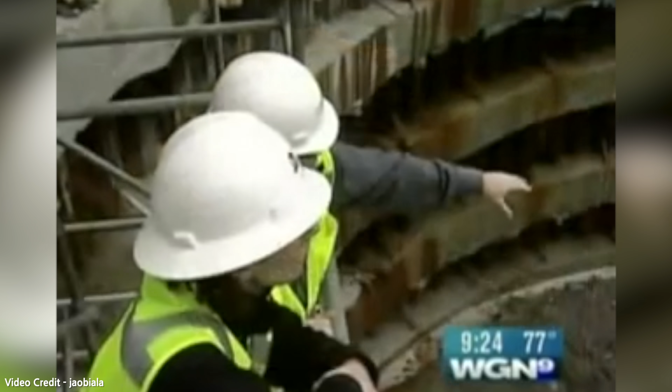What's even more mysterious is the enormous man-made hole in the ground. But that's actually the remnants of one of the most ambitious skyscraper projects in North America. It would have been not only the tallest tower in Chicago and America, but at the time, the whole world. This was truly a momentous project that was poised to shape the skyline of Chicago forever. However, as construction began on this monolithic tower, everything just stopped.

So today, join me as I look into what this infamous project was set to become, how millions of dollars were wasted on a dream so close to becoming reality, and how an 80-foot deep foundation sits abandoned even to this day. This is the Chicago Spire.

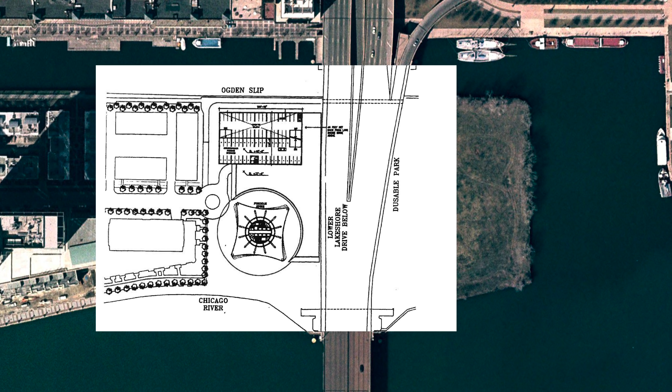The location of this project was set to be in DuSable Park, an undeveloped patch of land along Lakeshore Drive. However, because of that road splicing through the middle of the parcel, the tower's surface area would only take up around 2 acres of land, meaning it would have to be rather slender, at least for the area and time.

In early 2006, the Chicago Plan Commission had approved the tower to proceed further. Despite this, however, Fordham was having trouble finding their proper financing to get the project going. They eventually sold off their land and project IP to an Irish-based firm named the Shelbourne Development Company. Garrett Kelleher was their CEO, and now with their own money behind the concept, the tower's development moved forward.

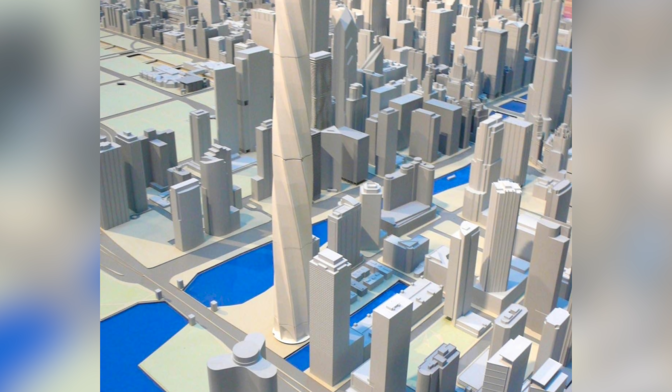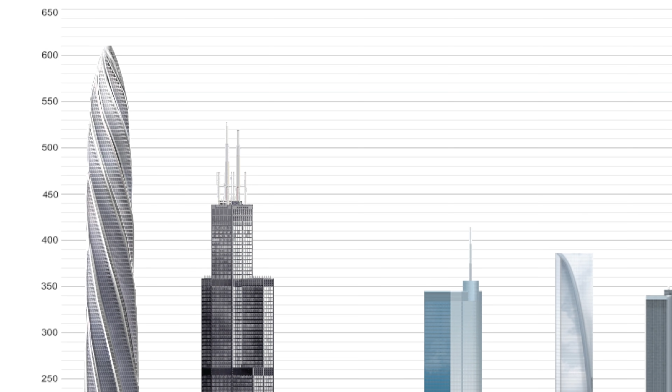With that approval from the city, the height restrictions were lifted, and plans grew to an all-condominium tower topping off at 2,000 feet. With the name now changed simply to the Chicago Spire, this new design also eliminated the radio tower, making the skyscraper into a 150-floor, 1,193-unit super condo building. The spire would rise well above the already tallest building in Chicago, that being the Sears Tower, and would have become the tallest building on the planet.

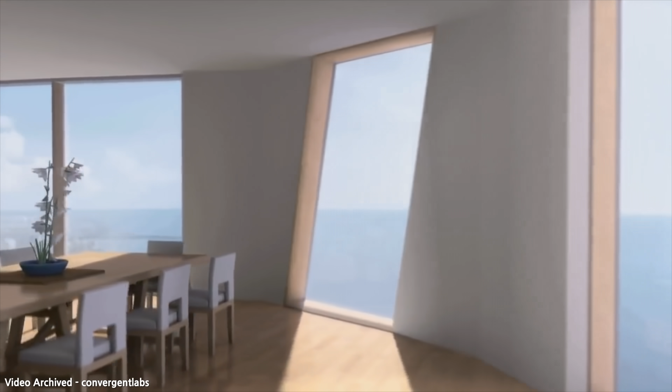That title, however, would have been beat out by Dubai's Burj Khalifa, which was set to open in 2010. Regardless, this tower was enormous and quite a unique piece of architecture for its time. In fact, careful consideration was given to how the design would affect natural occurrences like bird migrations, and the winding tower would allow for every apartment to have a slightly unique floor plan.

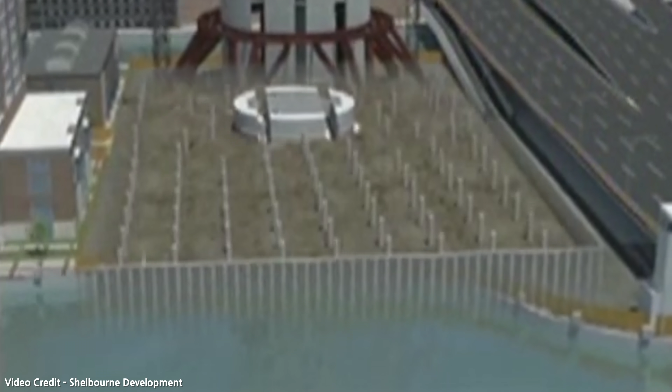It was promised to be eco-friendly and have minimal disturbances to the otherwise quiet neighborhood. It also was to be constructed so that the majority of traffic would funnel out onto Lakeshore Drive and not onto the quiet North Water Street. Actually, speaking of all of those cars, they wouldn't be crowding up valuable surface space. No, this enormous tower would have 7 levels of underground parking, making it the largest in the city.

Since that meant only the surface area of the building would be minimal, the rest of the adjacent land would become green park space open to the public. The total estimated cost of the project was somewhere around $2 billion, and as the development company worked closely with local leaders to revise the skyscraper even further, the Chicago Spire had a promising future.

With an estimated construction date of 2007 and an opening in 2012, by March of 2007, local residents seemed to have liked where this development went, and now the project met minimal opposition. However, it is important to note that many people had mixed feelings and doubt on even the validity of getting it done. But the developers of course pressed forward, and after the zoning committee and subsequent Chicago City Hall both approved the final project plans, Chicago Spire was fully approved and ready to start construction.

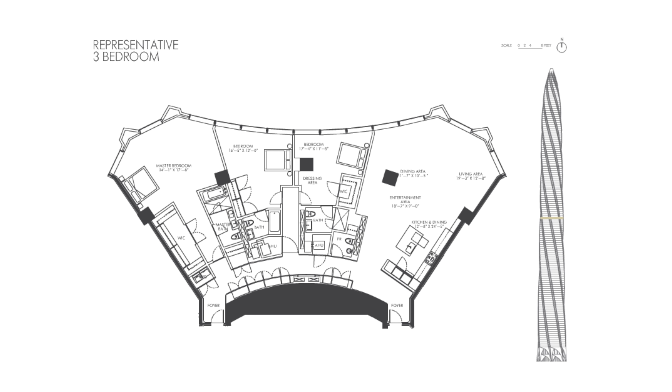Hundreds of thousands of dollars was spent on a sales center as floor plans began to pop up on the MLS, and by summer of 2007, ground was broken. Construction then commenced on the enormous and audacious foundation.

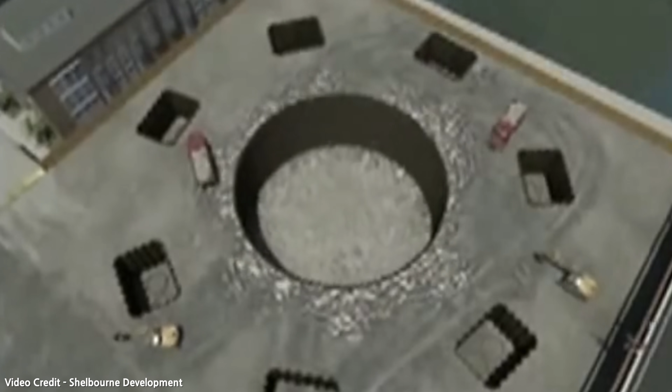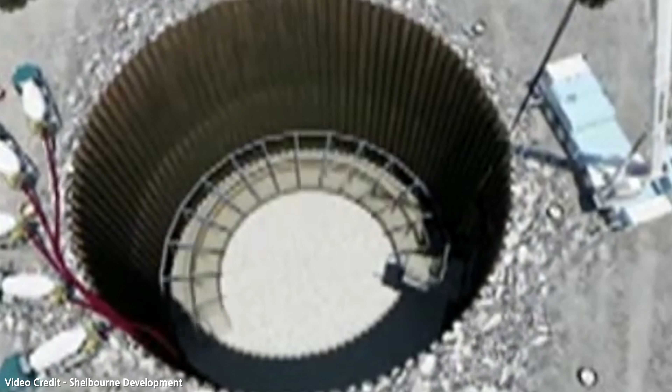Because Chicago Spire was such a tall and slender tower, a deep and complex foundation would need to be dug, first with what is called a cofferdam, essentially a large walled-off opening underground, to allow the tower's concrete spine, which would contain elevators and staircases, to be constructed.

By June, Shelbourne announced the Chicago Spire was already 30% sold, including the $40 million two-floor penthouse.

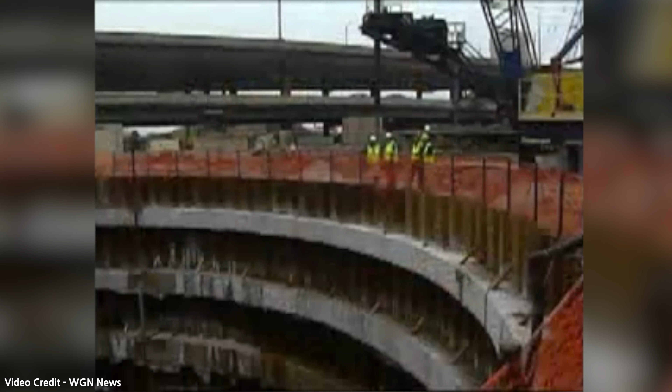How happy are you that 30% of the building is already sold? We're very excited about that. This project's going ahead. Were you a little afraid that if it wasn't going to sell, you're going to have to bring all this down? No. Never in doubt. Never in doubt.

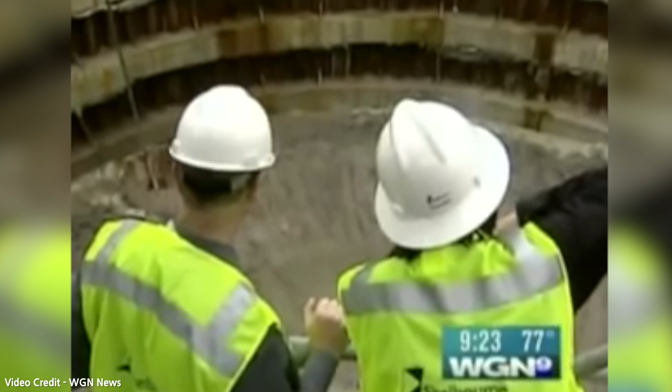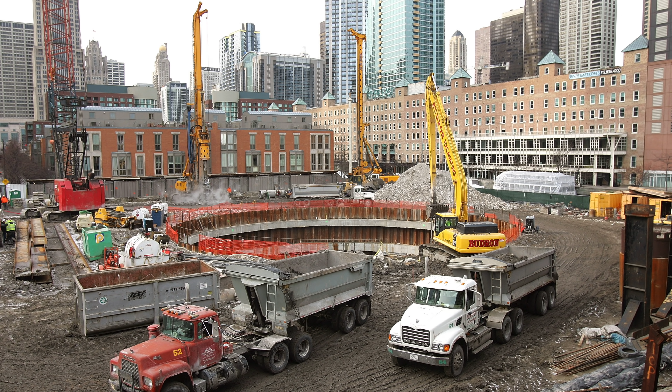People working on the project had high hopes, but this was all about to abruptly come to an end. By mid-2008, the subprime mortgage crisis was sending America into a recession, and obviously a financial crisis is bad for a luxury condo tower. As the completion of this foundation neared, it was announced work would slow down at the site. However, this is when things started to go wrong.

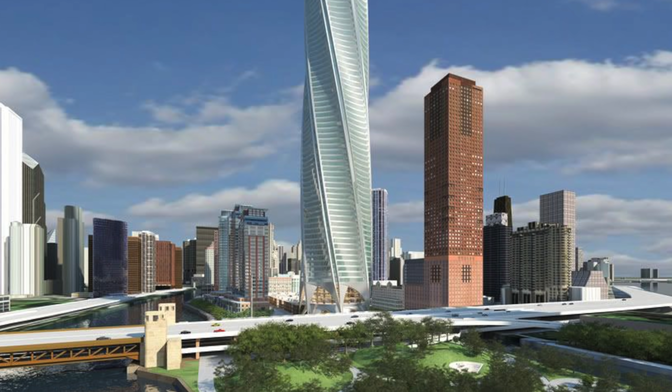By October of 2008, the building's architect Santiago Calatrava stated that Shelbourne owed him over $11 million in unpaid fees. Another missed payment of around $4 million was also claimed by another architectural firm they hired. The fees were stacking up, and to make matters worse, the primary lender for the operation, the crumbling Anglo-Irish Bank, was essentially on the brink of bankruptcy.

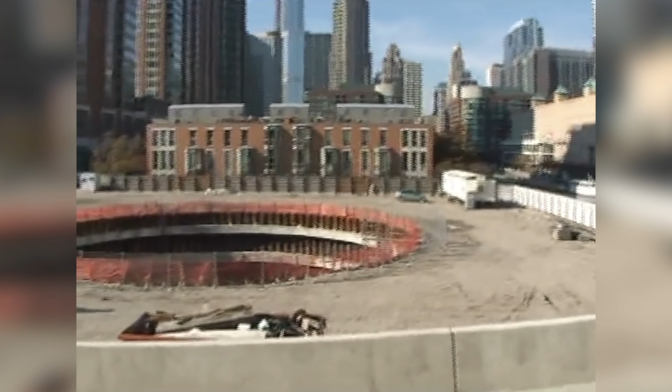With their lendings in peril, the bank had frozen all investments, now meaning the Chicago Spire was out of capital. Almost immediately thereafter, Shelbourne put the project on temporary hold until necessary funds could be allocated for further construction. This was a bad sign, and people who bought condos already started to ask for their deposits back.

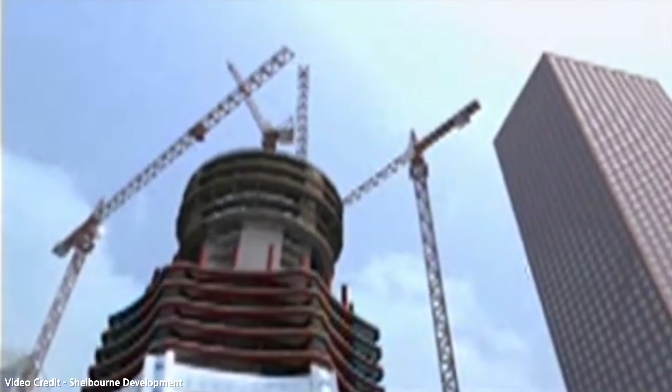Even more concerning was the fact that no construction company for the actual tower had been chosen yet, as the site stood still with no vertical progress. According to the Wall Street Journal, Shelbourne was in almost $70 million in debt for the Spire development.

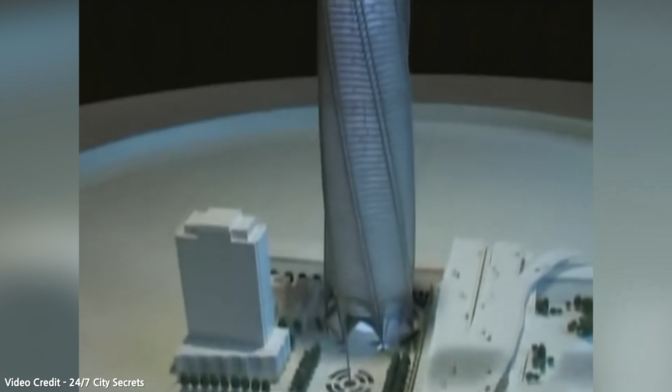As their financial condition worsened, even smaller aspects of the project were falling through. The building to which Shelbourne had been leasing space for their preview center filed a lawsuit claiming the company was over $300,000 late in rent payments.

By summer of 2009, and with little recovery from the global financial crisis, Bank of America then also filed a lawsuit seeking restitution of almost $5 million in unpaid loans.

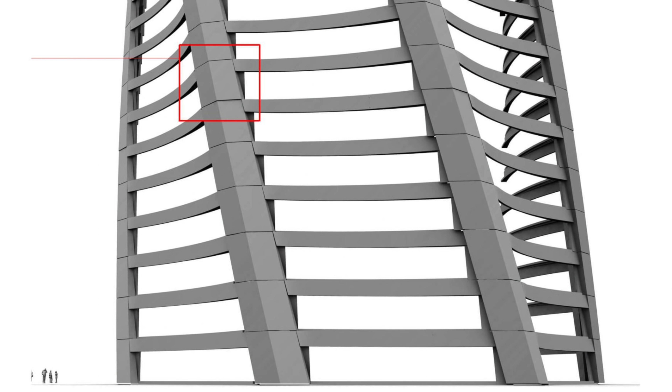By the end of that year, it seemed the luck of the Chicago Spire might actually begin to change, as Kelleher announced he would be meeting with the AFL-CIO, standing for the American Federation of Labor and Congress of Industrial Organizations. Jobs, especially in the city and really all of America, were scarce, and with unemployment creeping to all-time highs, the Spire project could become a huge source of several year-long jobs.

So if construction moved to an all-union-based workforce, then Shelbourne could secure a $170 million union loan. Within just a few weeks, however, this deal fell through, and when the Chicago Business newspaper asked other local unions if they would consider investing, they all said no.

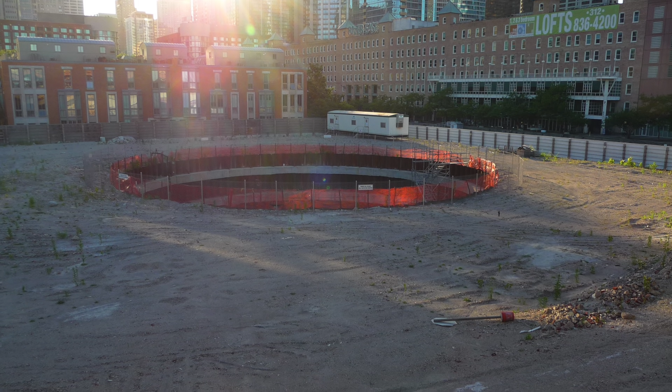It was now early 2010, and with the site sitting dormant, that suit over the unpaid rent at their preview center had finally been concluded, with Shelbourne being evicted from the building.

By the end of that year, yet another lawsuit was filed, this time from their old friend, the Anglo-Irish Bank. Now it was time for their reckoning, in the form of a $77 million lawsuit aimed directly at Shelbourne Development Group. Shelbourne ultimately filed for bankruptcy soon after.

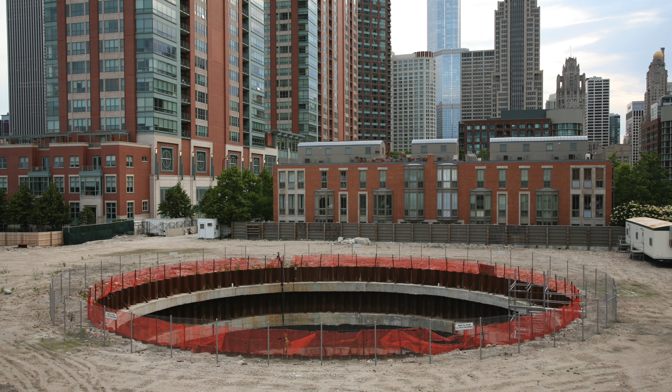As the project site sat abandoned over the next few years, in 2013 the property went up for sale through an Irish asset management company. The sale attracted several bidders, including Atlas Apartment Holdings, to which Shelbourne Development sought to partner with to emerge from their bankruptcy with a $135 million loan, as if they hadn't taken enough money already.

In this 2014 agreement, they would act as the developers and Atlas would manage the tower. Yes, they were still intending for the Spire to go forward. Shelbourne also agreed to a new payment plan with creditors, mainly a company called Related Midwest.

However, in true Shelbourne fashion, by October of that year, they failed to pay Related Midwest. With this payment delinquency, Related Midwest went for their land, filing a lawsuit to try and take ownership of the deed. Just a month later, the court ruled in Midwest's favor, and they took control of the property.

Soon after, it was announced that they would not build the Chicago Spire. The project, just like its foundations, was officially abandoned.

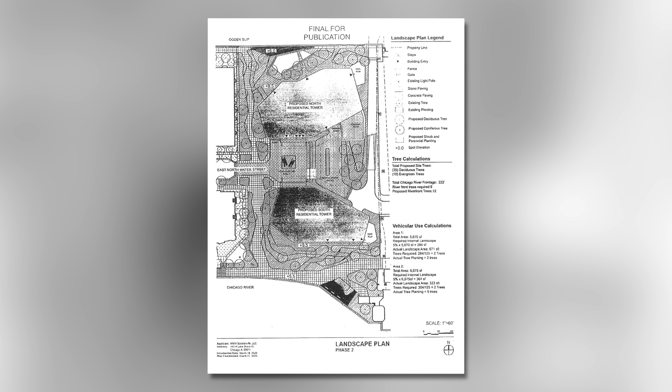Related Midwest then got working on their own, more feasible vision of the site. However, the Garrett Kelleher saga of lawsuits didn't end here, as in 2018 he filed a $1.2 billion lawsuit against the National Asset Management Agency for, quote, sheer spite and consistent incompetence when dealing with him and the Chicago Spire project. We'll see where that lawsuit goes.

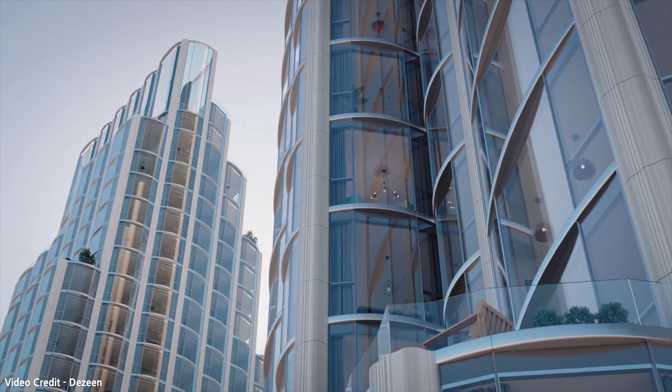Meanwhile, in the same year, Related Midwest revealed what their plans were for the former Spire site. Over the years there have been other concepts for the land, however this was the first with lots of planning behind it. They unveiled a 2-tower condo development, the tallest with a luxury hotel and mixed condos topping out at around 1,100 feet, with the smaller tower at 850 feet.

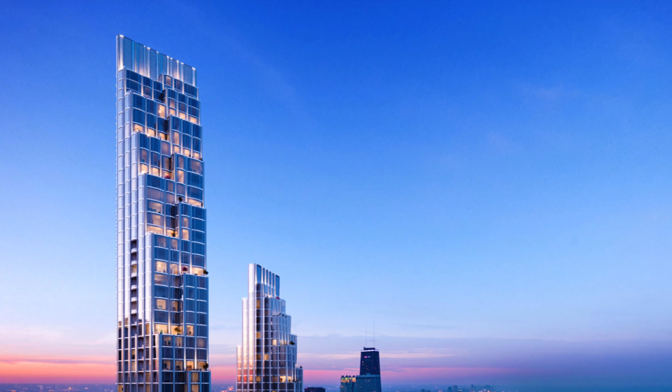The design is a lot less striking and certainly blends in more with the skyline, with interesting rounded glass panels shaping the towers. Emphasis was put on the actual design of the project, including elements harkening back from Chicago's architectural past. While this is a much more standard development and nothing that will necessarily grab headlines or break records around the world, it is beautiful and probably a more realistic project to see through.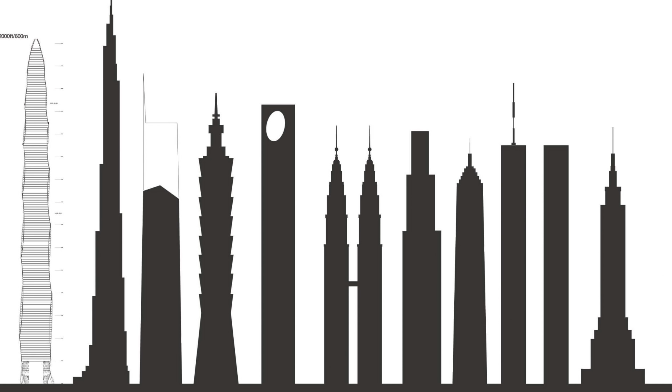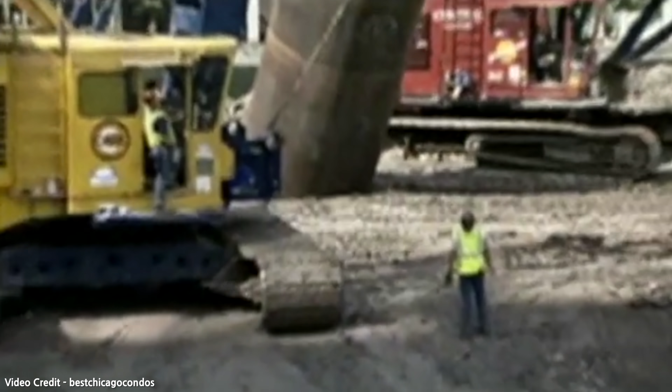At this point, it has been over 15 years since Christopher Carley had a dream for an ultra-tall skyscraper unlike any other in the world. One to keep Chicago reaching for the skies, and even for a short time, break world records. It would have drastically changed the skyline of the iconic city, and it is truly unbelievable how close it got.

However, at the same time, I can understand why many people would say, well, all they did was dig a hole, and yeah, to some extent that is true. I don't think the developers who eventually took control of the Spire set out to scam people, but the mess that it turned into doesn't look great.

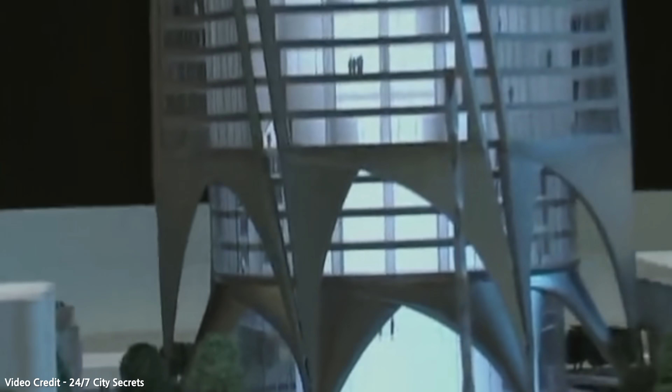According to Kelleher, he stated that he personally invested $195 million into the project. That absolutely blows my mind, because at this point, the Spire is never getting built, and all of the time, money, and effort from hundreds of people, all confident they were building something so big and so real, well, it was all for nothing. So yeah, it is a bit annoying to think how that money could have been alternatively spent. However, in their defense, I think at least they had no idea that this would be the outcome.

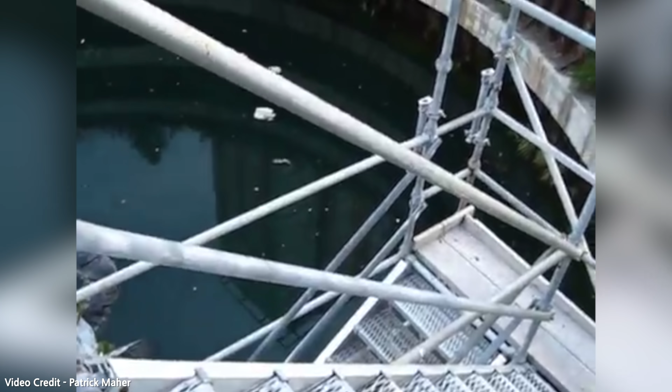Afterwards, the remnants of the tower can only be seen from the enormous circular hole in the ground. After all these years, now filled with water and foliage surrounding the rim, the scaffolding just has a staircase leading down into deep water, and the hole now is a local joke in Chicago. Perhaps the foundation will be used in the new development, but I think in some way this site will always be remembered for the infamous concepts of what would have been. One that had high hopes, but after a catastrophic series of events, sent this tower spiraling in the wrong direction.